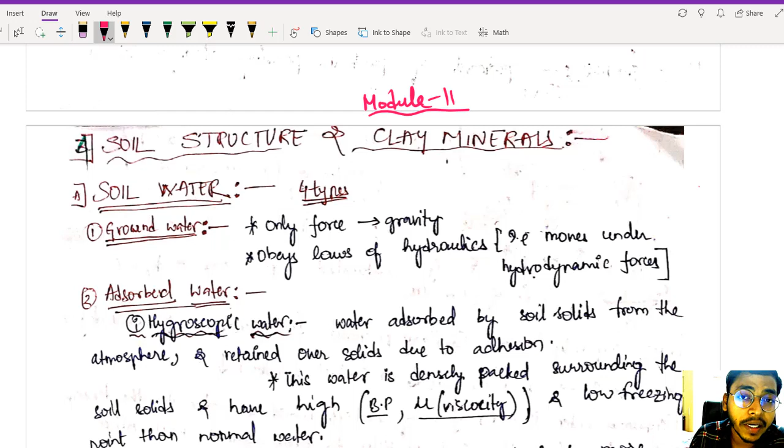In this video, I am going to continue with module number 11 of soil mechanics. We are going to start a fresh chapter, soil structure and clay minerals. All the basic concepts like soil water, bulking of sand - you might have heard this term, right? We will study that concept also in this module. After that we will see soil structures like honeycomb structure, flocculent, dispersed - these we will cover in module 12, where I will also sum up this chapter with clay minerals like kaolinite, illite, montmorillonite. This is a very basic theory chapter, no numericals will be asked, but this theory is important for small exams like SSC, JE, State PSC. So please concentrate on this topic, a bit can come from anywhere.

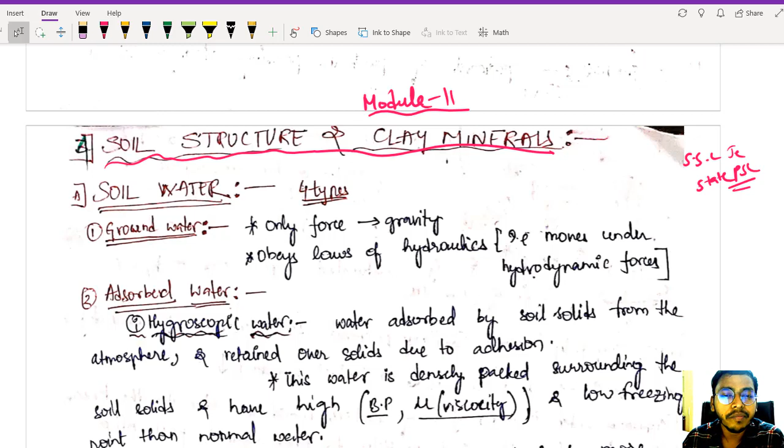Now coming to soil water, the very first topic which I am going to teach. There are four types of water which you have to understand. In soil there are four different types of water present. Let us try to imagine this.

Below the ground level - just go outside your home, wherever you are standing, let us say that is the ground level. Below the ground level, somewhere here we will be having our groundwater table. Below the groundwater table, groundwater is flowing. All this soil below this is completely saturated, so this zone is also called the zone of saturation. The water present in this zone, we are calling it groundwater.

What is the force acting on groundwater? It is gravitational force. So my groundwater will be flowing in the direction in which gravity is pulling it - it's a matter of common sense. So all the laws of hydraulics are valid for groundwater. Like continuity equation, whatever equation you want to apply of hydraulics, you can apply for groundwater, no issues. Now let us see the second type of water.

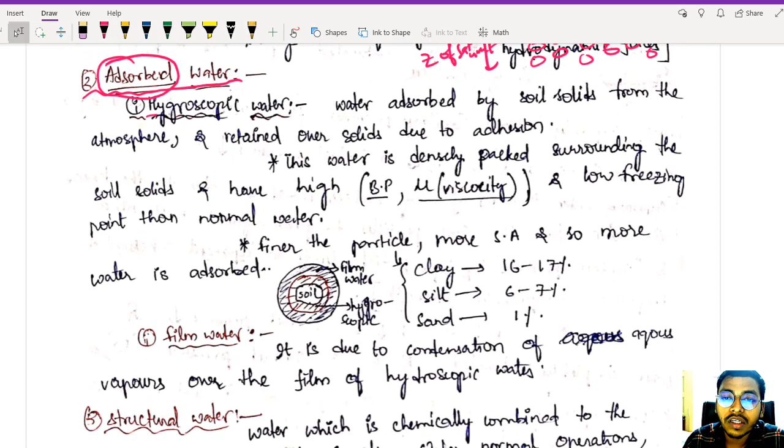So the second type of water is adsorbed water - the name itself is saying it. The water which is adsorbed on our soil solids, we call it adsorbed water. There are two types of adsorbed water: one is hygroscopic water, second is film water. So what is hygroscopic water? It is nothing but the water which got adsorbed on the soil solid.

From the atmosphere, we are calling it hygroscopic water. Water adsorbed by soil solids from atmosphere and retained over solids due to adhesion, we are calling it hygroscopic water. I hope you remember these terms, right - adhesion and cohesion.

Do you remember, I taught this in fluid mechanics - cohesion? If you have intermolecular forces between molecules of the same nature, what do we call it? We call it cohesion - intermolecular forces between particles of the same nature. For example, if you take clay, the clay particles are bonded with each other. So this force acting between these particles, I am calling it cohesion, because all the particles are of clay. So there is some bonding between them, intermolecular forces present between them - we are calling it cohesion.

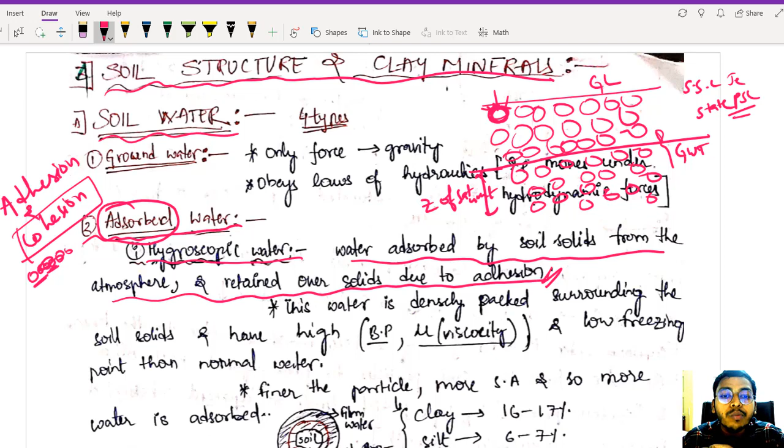So what is adhesion? For example, just dip your finger in water. What is happening? When you take your finger out, you will feel water is present on your finger, right? What happened? There is some affinity between your water molecule and your finger. If there is intermolecular force of attraction between molecules of different nature, we call it adhesive forces or adhesion. So dip your finger in water, take it out, you will feel there is some wetness on your finger - this is because of adhesion between the water molecule and your finger. I hope you understood the difference between adhesion and cohesion.

I had also given you a hint on how to remember this. You might get confused after some time, like after 3 or 4 months, between adhesion and cohesion. What is the hint I have given?

Remember in alphabetical order: A B C D E F G H I J K L M N O P Q R S T. So in alphabetical order, I am writing these terms.

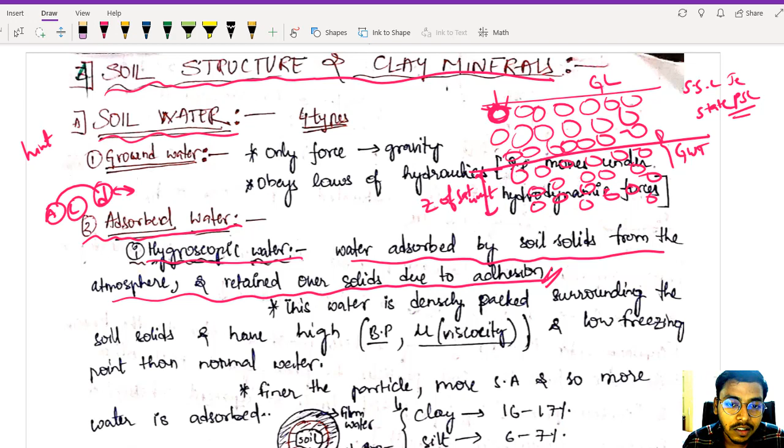Adhesion is for different particles, cohesion is for same particles. This is how I remember it, because the confusion is mostly between which one is different and which one is similar. Just write these terms in alphabetical order: adhesion becomes D, which is different particles, and cohesion becomes similar particles. Maybe this will be helpful to you also in some exam.

So let us understand this hygroscopic water. It is tightly packed, densely packed. So what happens is it will have high boiling point and viscosity. As it is tightly packed, it does not move easily, so we call that viscosity very high. So this water which is densely packed surrounding the soil solids will have high boiling point and viscosity, and low freezing point compared to normal water.

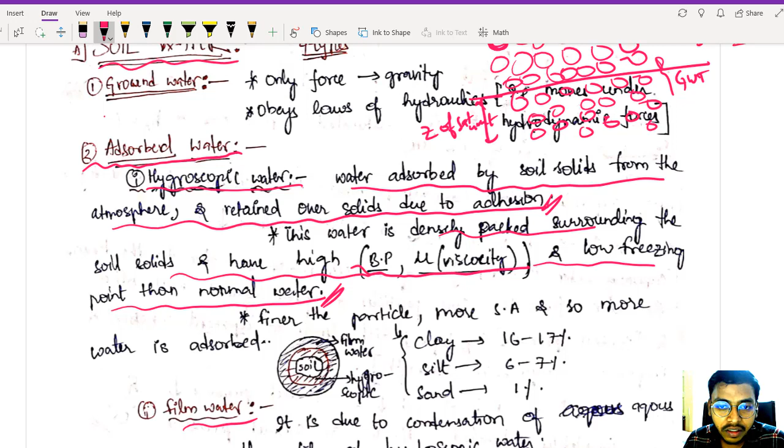Things are clear? I hope you understood what adsorbed water is. Finer the particle, more surface area will be there, so more water will be adsorbed. It's common sense, you already know, right? If the particle is finer, if you have fine soil, your surface area will be more compared to coarse grain particles. So more water will be adsorbed for fine grain particles compared to coarse grain particles. This is the first type of adsorbed water, hygroscopic water. I hope you are clear, right?

Now let us see what is film water. On this hygroscopic water, let me draw it. If this is soil, on the soil you will be having this hygroscopic water. On this hygroscopic water, there will be one more film formed. This is because of condensation of aqueous vapors on the soil solids. Because of the condensation, you get one more layer, and this layer we call film water. So it is due to condensation of aqueous vapors over the film of hygroscopic water.

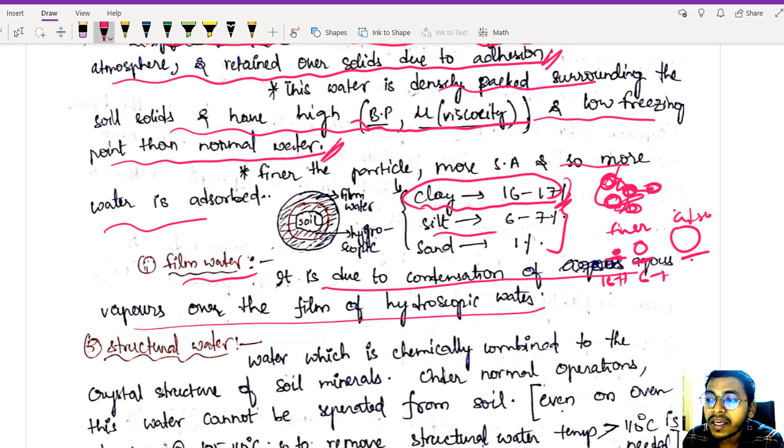So basically I told you, the finer the particles, the more is your adsorbed water. So you can see for clay it is around 16 to 17%, whereas silt, because clay is finer compared to silt, and silt is finer compared to sand, you can see the magnitude. In clay, the water content due to adsorbed water is around 16 to 17%, whereas for silt it will be just 6 to 7%. For sand, it is more coarse, so surface area is quite less. So as surface area for sand is less, it will be having only 1% of water content because of this adsorbed water. Things are clear?

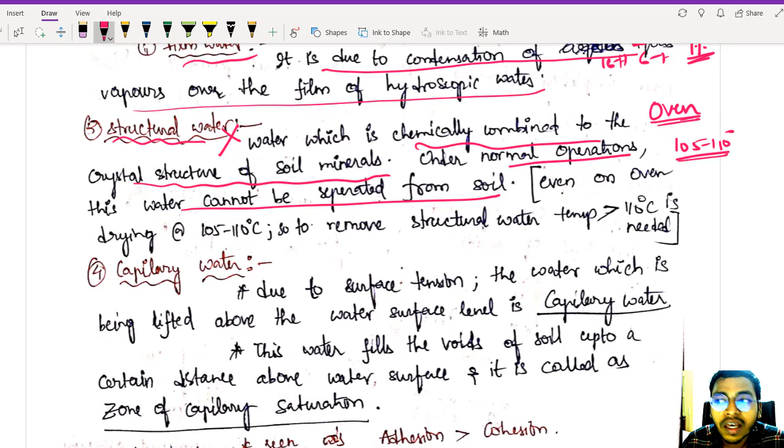Now let us see structural water. I have already explained structural water once before in previous chapters. What is it? The water which is chemically combined in the crystal structure of minerals itself, present inside your soil solids. Whatever mineral content the soil has, the water molecules present inside it, we call structural water - water which is chemically combined to the crystal structure of soil minerals. Under normal operations, this water cannot be separated, as it is present inside soil solids, you cannot take it out. If you are heating in the oven dry method, I have told you we heat only up to 105 to 110 degrees in inorganic soil, so that structural water is not evaporated. If you heat more than 110 degrees, only then structural water will be released. So in oven dry method, our limit is 110 degrees. If you want to remove structural water, you have to heat at very high temperature, more than 110 degrees, only then this water will be released.

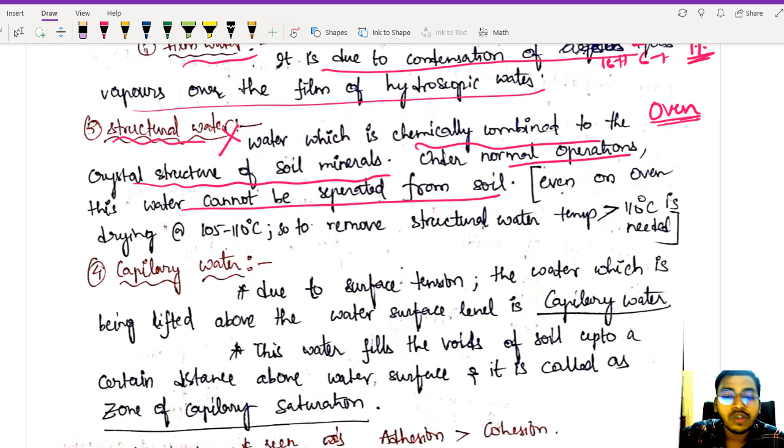Things are clear? Now let us see the last type of water, which is capillary water. Due to surface tension, some of the water from the groundwater table is being lifted above.

Okay, so this water is called capillary water. Let us try to understand. This is my groundwater table. Below this, the soil is fully saturated.

Above here we have a zone of aeration. The top layer we are calling zone of aeration. So the layer which is just above the zone of saturation, above this groundwater table, it will also be saturated. How? Let us try to understand.

See, when I am talking about soil solids, it will have some voids, and in these voids there will be some capillary action. Because of this capillary action, my water is rising above this groundwater table. Actually, gravitational forces act in downward direction.

So basically water should flow from top to bottom. But here the water is flowing against the gravitational forces and trying to go up. This is called capillary action. Because of this capillary action, we are getting this zone of capillary saturation, or zone of capillarity.

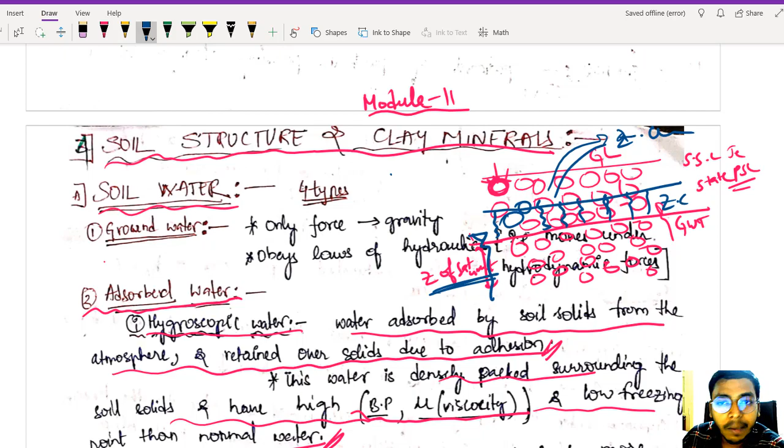Things are clear? Okay, now let us read this definition and then I will derive this formula in like 10 seconds. It is not necessary to derive it in soil mechanics, this is the concept of fluid mechanics, but just to make you feel easy, I will derive it once again.

So capillary water: due to surface tension, there is adhesion between soil particles and water. Because of this adhesion, there is some affinity between solids and water. Because of this affinity, the water is being lifted above, because of this surface tension, and the water which is lifted above this water surface, we are calling it capillary water.

So above this groundwater table, whatever water is raised, we are calling it capillary water. This water has risen against the gravitational pull, you have to remember this. This water fills the voids of soil up to a certain distance above the water surface, and this zone we are calling the zone of capillary saturation. Things are clear? Everything fine?

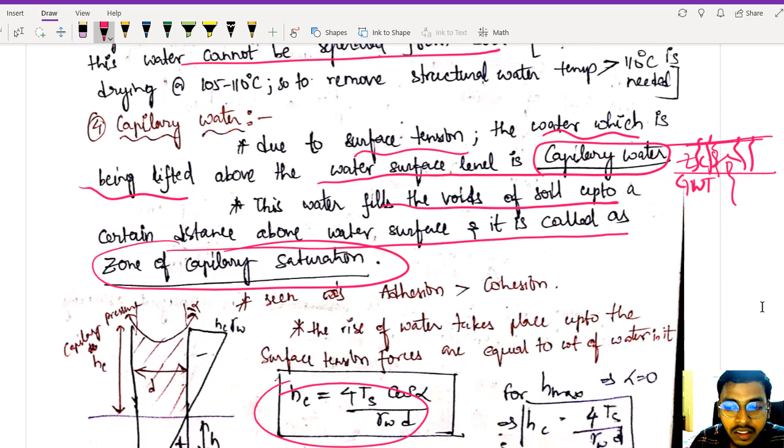So let us derive this. Very simple. In fluid mechanics, we used to take one capillary tube and immerse it in water. A capillary tube in general will be less than 1 centimeter diameter, and we just have to immerse it in water. When we immerse it, I'll draw it a bit bigger so it's visible, actually it should be less than 1 centimeter but it won't be visible, so I'm drawing it bigger.

So if you take big tubes, you won't see any rise because it is inversely proportional to diameter. If your diameter is bigger, the height of rise will become quite small, negligible. If you take a smaller diameter, then obviously your height of rise will be more. So what is happening here?

There will be a certain rise in water surface because of this surface tension. Obviously the water which rises in tubes, you might have seen in a chemical laboratory, you've done a lot of experiments with pipette, burette. The water level will be in the form of a meniscus here. I hope things are clear.

So there is some surface tension acting, which is lifting this water up to a certain height, and this height I am calling capillary height, HC. How to calculate this capillary height? The height the water has risen above its original surface, we are calling this capillary height. How to calculate? Very simple.

Here your tensile force is acting. In 2 dimensions it looks like this, but in 3 dimensions, just imagine we have a circular tube. All around this circle there is water which is in contact with the glass, so surface tension is acting all over the circle. In 2 dimensions I am representing it this way, but originally it is acting all over the surface.

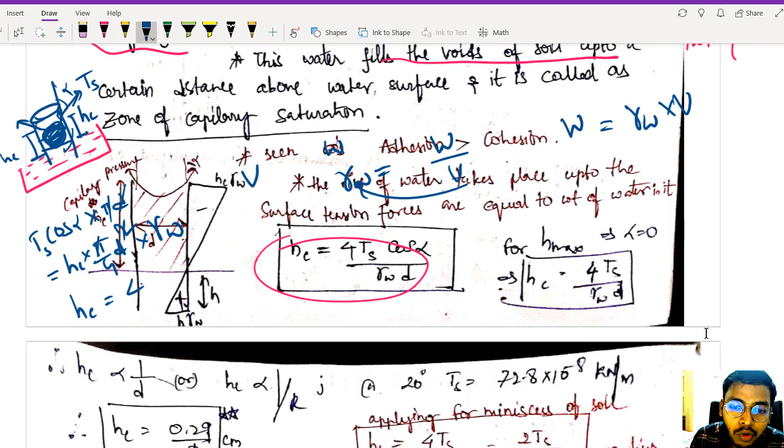But if you want weight, what to do? You know the volume, you want weight - just use gamma w equals weight of water divided by volume. So if you want weight, just multiply by gamma w into volume. Pi cancels, d square cancels. So if you want hc, you send 4 above: hc equals 4 Ts cos alpha divided by gamma w into d. So this is my formula, as simple as that.

Now a derivation - if you assume this alpha is equal to 0, meaning it is acting perfectly straight, that is the assumption, though actually alpha remains. If we assume alpha is equal to 0, then cos alpha will be 1. If alpha is 0, cos alpha becomes cos 0, which is 1. So I can write 4 Ts by gamma w d.

So this is my H maximum. H maximum comes when alpha is equal to 0. So your maximum height which can be raised in the capillary tube is 4 Ts divided by gamma w into d. Very simple, right? I hope you understood perfectly.

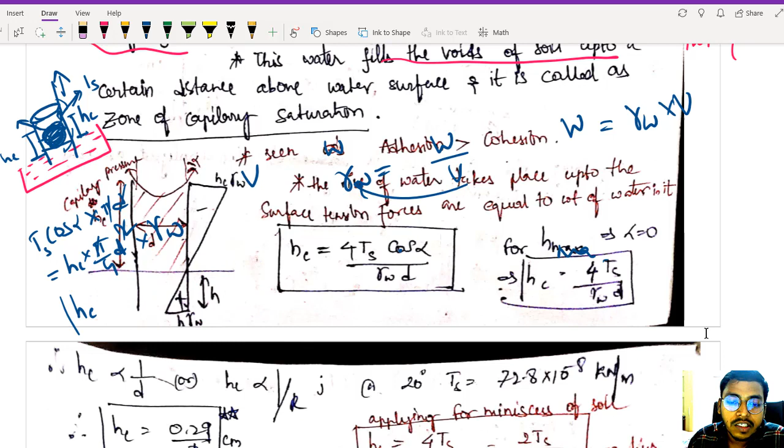So you can see your height of rise is inversely proportional to diameter. If diameter is small, height of rise will be more; if diameter is large, take a bigger tube, and very little height rise will remain. Things are clear? So as it is inversely proportional to D, I can also write it is inversely proportional to R.

Okay, things are clear? So basically at 20 degree centigrade, the surface tension Ts will be 72.8 into 10 to the power of minus 8 kilonewton per meter. So if you substitute this, you will get this equation: your height in the capillary tube will be 0.29 divided by D, in centimeters.

Now let us apply this concept in soil. We have done this experiment in the laboratory using a capillary tube, and we got Hc equals 4 Ts cos alpha by gamma w d. Very good. But now let us apply this in real life conditions. What will happen in soil? Let us try to understand.

So when I have solids, let us say this is my soil solids, and water rises in the voids - in between the soil voids, wherever the voids of the soil remain, water will be there. So water will take the same form of meniscus as it does in the capillary tube.

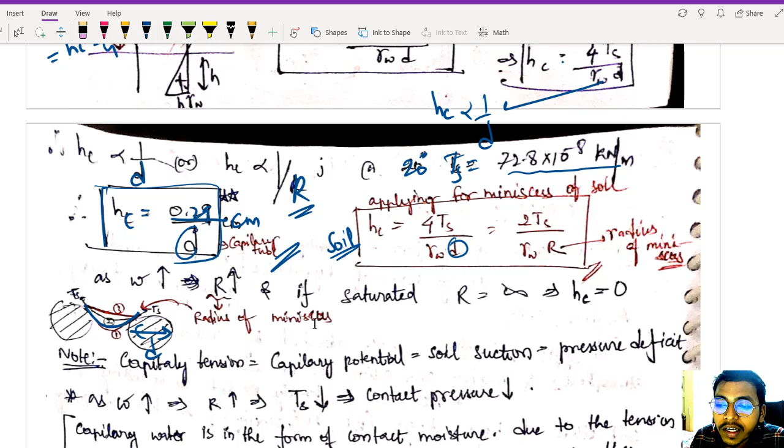Things are clear? So now tell me, what is the D here? When we use this D in the formula, many people get confused - it is not the diameter of the solid. It is not the diameter of the solid particle; in capillary rise it was the diameter of the water tube, and here too it will be the same. It is the diameter of the voids, or to be precise, you can say you are following this meniscus.

A meniscus is forming, and here surface tension is acting. So you can say it is the diameter of your meniscus, or in simple language, diameter of your voids, but more precisely, diameter of your meniscus. Things are clear? I hope you understood this point.

So your height of capillary rise in soil will be 4 Ts by gamma W into D, where D is diameter of meniscus. Or you can write 2R instead of D, where R is radius of meniscus. So 2 cancels out, and you get 2 Ts by gamma W R, where R is your radius of meniscus.

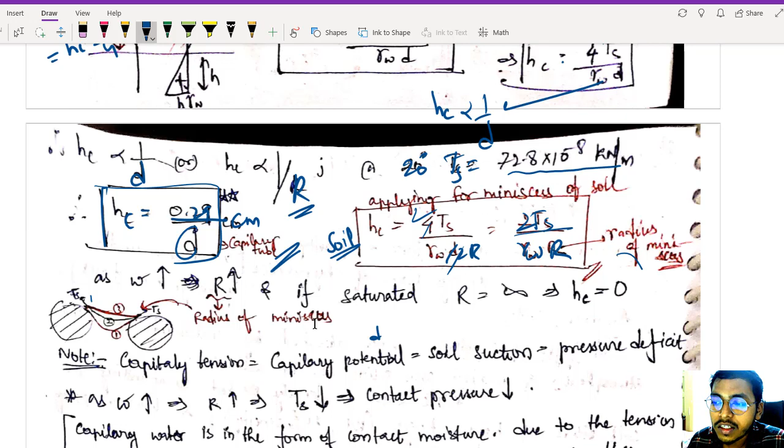Now let us try to understand what is happening in this soil. See, first of all, you have some meniscus like this. When water level is less, you will be having some meniscus like this.

But as your water content is increasing, as more water is present in between soil solids, what will happen to this meniscus? The meniscus will get straightened. Pehle meniscus tha kuch is tarah se, it was something like this. Now as it gets more water content, slowly it is getting flatter.

Okay, let us zoom this diagram. Previously my meniscus was something like this. So as the water content is increasing, what will happen? This meniscus will start to get straightened up, so it will be getting straightened up as your water content is increasing. Agreed? So what is happening to your R value as your water content is increasing?

What is happening to your R value? Let us try to understand. Previously, in the first case, when you have a meniscus something like this — circle form kar lena — what was your radius? This was your radius, this was your radius. Radius was very less.

Now when it got straightened up, when it got a little bit straightened up, what is happening? Ek circle daal lena, you are getting a bigger circle. So what happened to your radius? Radius is increasing. When it got flattened, for example when the water content has raised to the extent that it is fully saturated, so what is your R value now? R value is infinite, you cannot draw a circle, right? Itna bada circle hai, toh R infinite ho jayega.

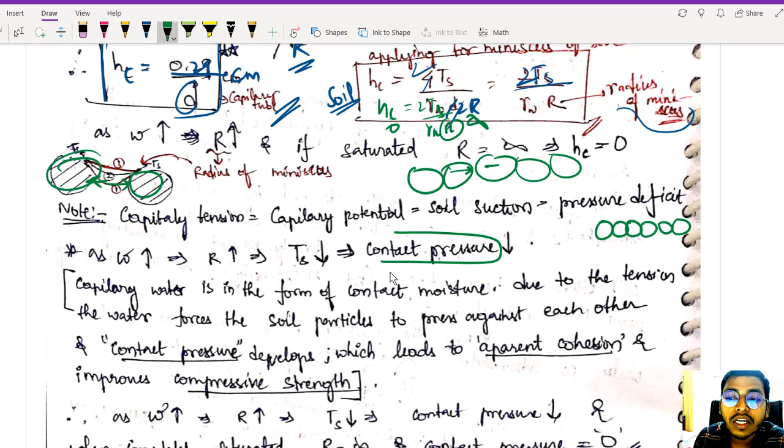The pressure developed in between the soil solids, we are calling it contact pressure, because as they are in contact, as the tensile force increases, what happens? More the tensile force, more your contact force will be, the more your contact pressure between soil solids will be. It's common sense. I hope you're perfect in this thing.

Because of this apparent cohesion, even sand particles will feel they have some affinity. So what is happening? Strength is increasing. Because of this apparent cohesion, your strength of soil is increasing.

Now let us try to understand. This is a very important bit. Your capillary tension has many names. It can also be called capillary potential, one and the same. Whenever I am using capillary tension, it is same as capillary potential. If in the exam they give capillary potential, don't get confused, it is same as capillary tension.

Or it can also be called soil suction, or pressure deficit. All these names are of capillary tension only: capillary potential, soil suction and pressure deficit. So what is happening?

As our water content is increasing, because of these capillaries, our water content in soil is increasing. Because of this water content rise, the radius of our meniscus is increasing. Previously it was something like this, but with more water content, this is getting straightened up. I explained this above, right?

So as it is getting straightened up, your surface tension will be decreasing, and so your contact pressure will be decreasing. Surface tension is reducing. If surface tension is reducing then tensile forces are reducing, so compressive forces are also reducing. Your contact pressure is decreasing in between solid particles. Things are clear? More the water content, your contact pressure will be less.

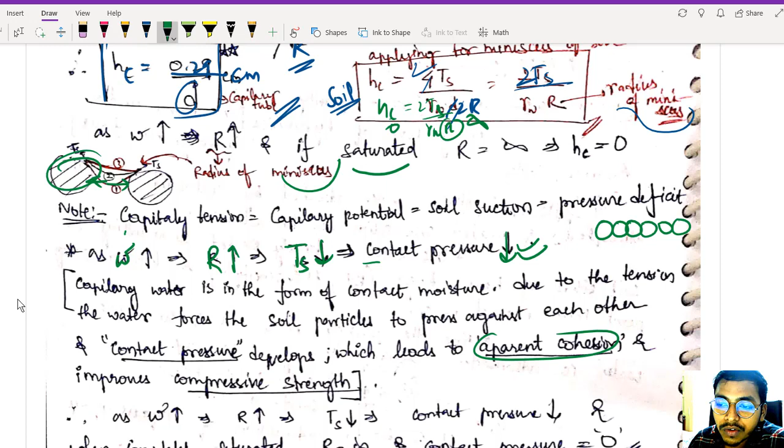So capillary water is in the form of contact moisture. Due to the tension, the water forces the soil particles to press against each other and contact pressure is developed. This leads to apparent cohesion. I hope things are clear, right?

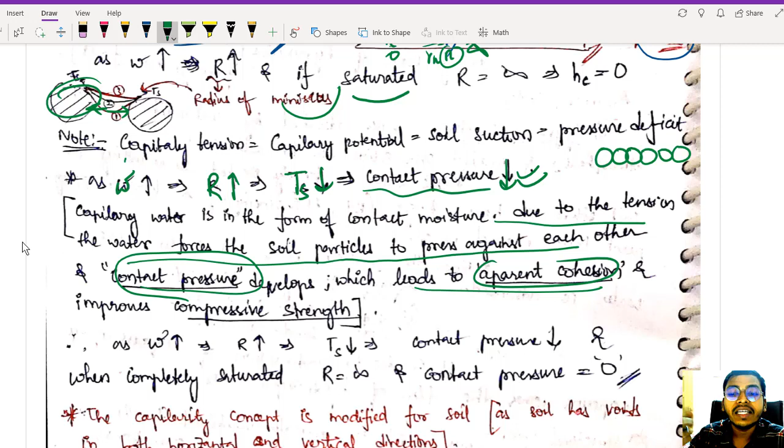Because of this contact pressure, there is apparent cohesion between solid particles and it improves the compressive strength of soil. But as you continuously add water, your radius of meniscus increases, your surface tension decreases. If tension is less, obviously your contact pressure will be less. If your contact pressure is less, this apparent cohesion will slowly go out.

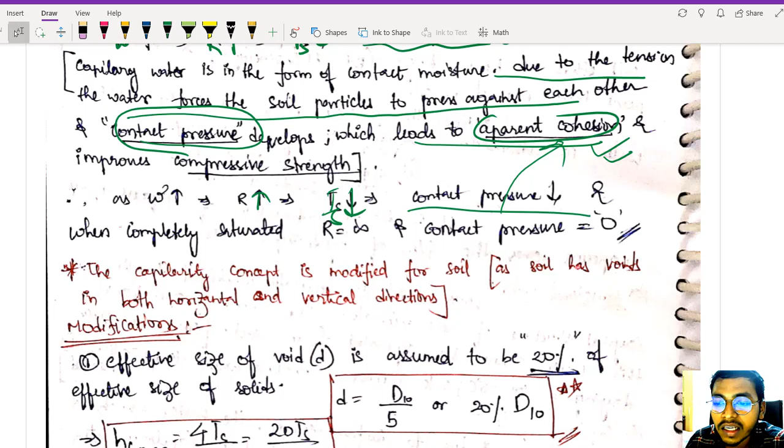I hope things are clear. And slowly your soil will be losing its compressive strength. As you are saturating, it will be losing compressive strength in this zone. Things are clear? One important thing you have to understand. So far you are perfect, right?

One more thing you have to understand, this concept whatever you have read, HC equals 4TS divided by gamma WD, cos alpha will also be there. If you neglect cos alpha, this was the formula which you got. But this is when you have a vertical tube like this capillary tube.

But imagine, when you take our soil in natural condition, you have voids in vertical direction and horizontal direction also, agreed? So we cannot exactly use this formula. We have to modify this formula. How to modify? Let us try to understand.

We have to take, instead of d, we don't know this d value, right? So we have to take this effective size of d to accommodate this horizontal and vertical void direction. So we are taking this d as d10 divided by 5. What is d10? Effective size of your soil solid, whatever d10 comes, so d10 divided by 5 gives us the effective size of void. Things are clear? So d10 by 5, or you can say 20% of d10.

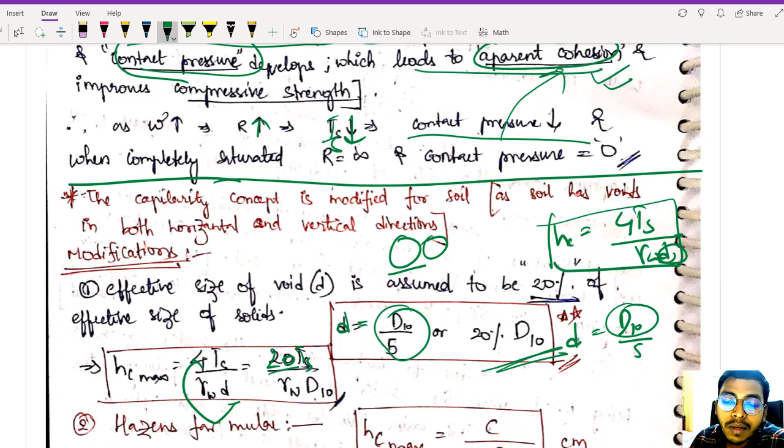So just substitute d10 by 5 here, instead of d, what will you get? 5 will go to the numerator, so you will be getting 20 TS by gamma W d10. It's common sense. So your HC maximum will be 20 TS gamma W d10.

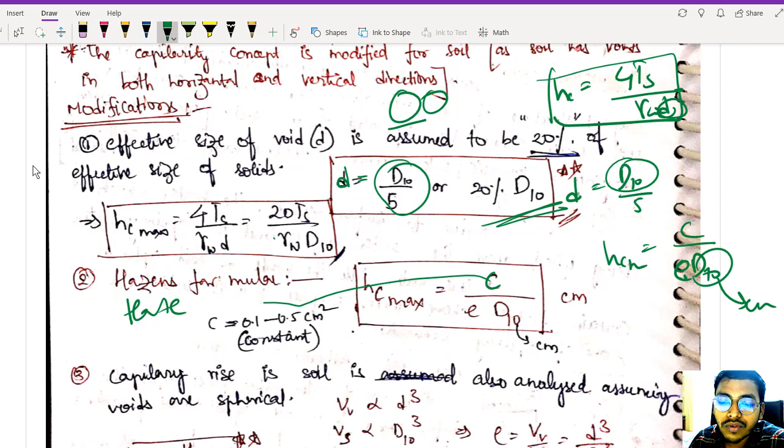Remember this, important for objective purpose. There is one more formula given by Hazen, he directly gave it: HC maximum equals C by E into d10, where d10 is in centimeter. Very simple formula, C by E d10, and C was a constant ranging from 0.1 to 0.5 centimeter square.

There is one more assumption: we can assume our voids are spherical. So if my voids are spherical, what will be the volume of voids? When taking a sphere, volume will be proportional to diameter cube, so volume of voids is d cube. Similarly, volume of solids will be effective size, effective size is d10 cube. So I can write void ratio Vv by Vs as d cube by d10 cube now.

Agreed? So what will be my d? D will be E to the power of 1 by 3, d10. Because I just sent the cube to the other side, so 1 by 3 comes. So d is equal to E to the power of 1 by 3 capital D10. If I substitute this, I will be getting HC max equals 4 TS gamma W E to the power of 1 by 3 d10.

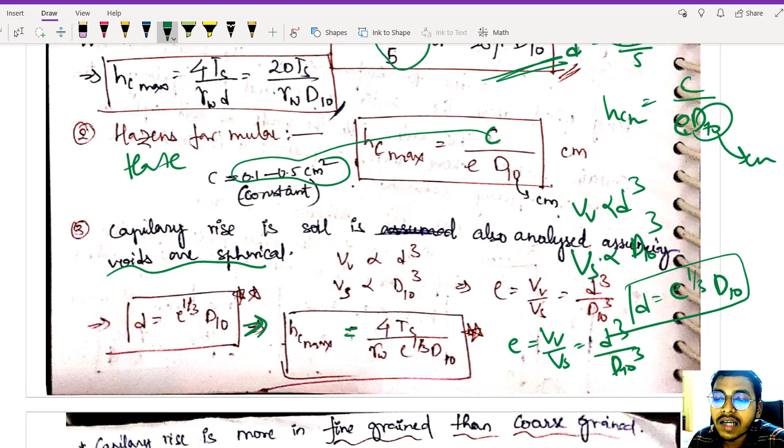So these are the various forms of HC maximum we have in our soil mechanics. I have told you our HC is inversely proportional to diameter.

So what happens: if you have a fine grain soil, our capillary rise will be more, because fine grain soil has very less voids, the void area is very less since they are tightly packed, so the rise will be more. If you take coarse grain particles, they are loosely packed, they don't pack straight because of coarse grain particles, so there is a lot of void distance. As there is more void distance, the capillary rise will be less. Remember this: capillary rise is more in fine grain soil compared to coarse grain soil.

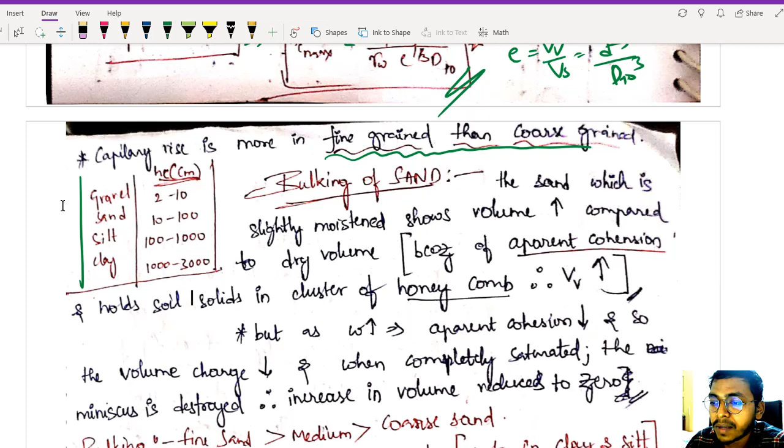Bulking of sand is because of moisture content. Let us understand what is happening. First, when the soil is in a dry state, if I take this sand, it is coarse grain, it doesn't have any cohesive forces in it. There are no cohesive forces, its strength is quite low, and the sand will generally be in a coarse grain structure, something like this, because of gravity, random orientation will remain.

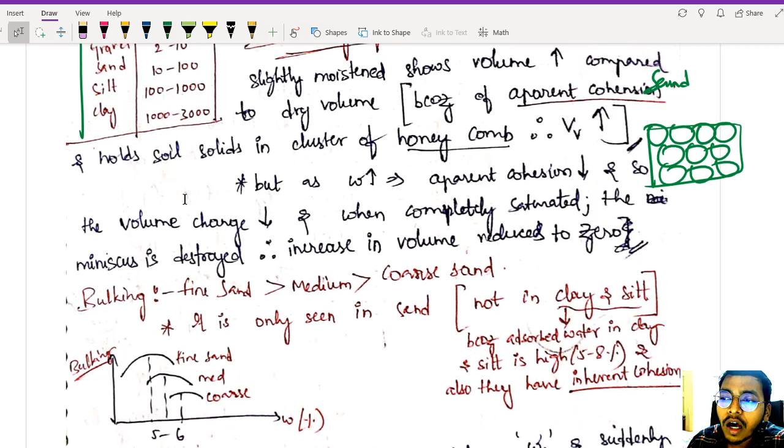We'll read the details, no issues. So here you can see this is how coarse grain structure will look, no particular shape, as gravity force pulls it into that shape. Things are simple, right? Now the strength will be quite low. Now as soon as you add water, what will happen is the contact pressure concept we studied earlier, contact pressure will increase as water content increases in the sand.

If you are adding some water, water content is increasing because of it contact pressure is increasing. Contact pressure increases, so apparent cohesion increases. There will be some cohesion in between the soil solids.

So what is happening? Soil solids can now have certain strength and they will reorganize the structure, they get modified into honeycomb structure. Generally this honeycomb structure is seen only in fine grain solids. But now, as it got some apparent cohesion, it has some intermolecular force of attraction similar to that of fine grain solids, and it can rearrange itself into the honeycomb structure.

So what is happening, your volume of voids is increasing now. As it got some strength, it can rearrange in a better way and it is getting a honeycomb structure. So your volume of voids is increasing. This is called bulking of sand. As you are adding some amount of water, your volume of sand is increasing. The sand which is slightly moist shows increase in volume compared to the dry volume. So this increase in volume we are calling bulking of sand.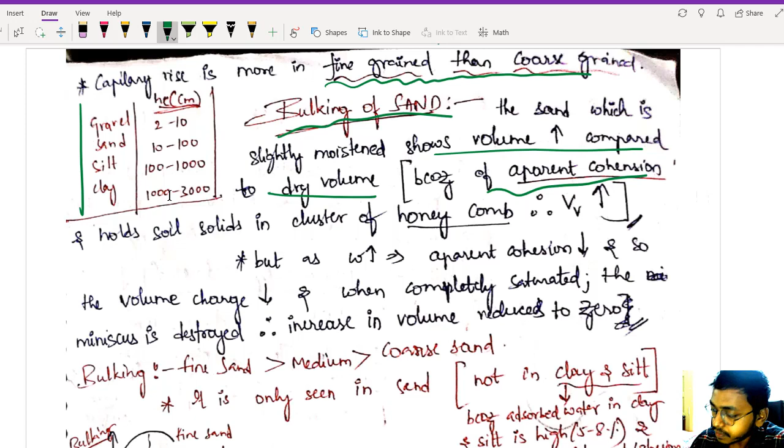Why is this increase there? Because of apparent cohesion. Because of apparent cohesion, now it can hold the soil particles in a better way, it can hold the solid particles in a better way. It will hold them in the form of a honeycomb structure.

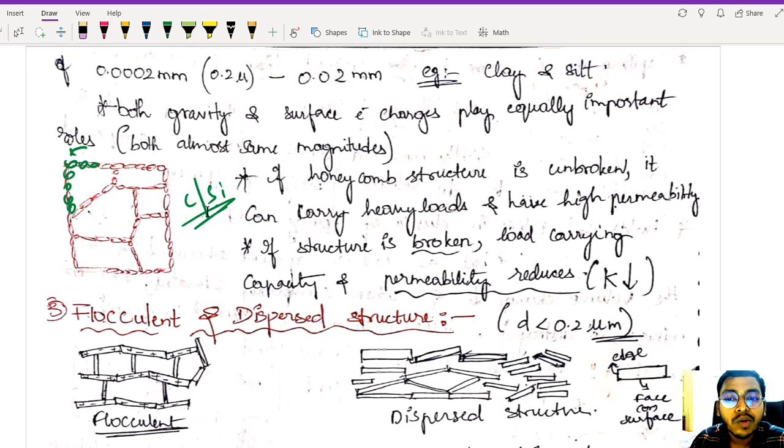But what is happening, when you add water in sand, there is some apparent cohesion, so it can rearrange itself into a honeycomb structure, and we are seeing this bulking of sand.

I had told you one more thing: if my water content keeps on increasing, what will happen to your apparent cohesion? Apparent cohesion decreases, remember? So if you keep on adding water, your apparent cohesion is decreasing, and because of that your volume will again start to decrease.

Initially it was a dry sample, let's say this is my dry sample, my volume is up to this level. Now I added some water, as soon as I added water my volume increased. But if you keep on adding water, my volume will again start to decrease. You can see the volume increased, now again the volume has started to decrease.

If you keep on adding water, if you saturate it, what will happen? If it is completely saturated, then your meniscus is completely destroyed, as we studied earlier. If the meniscus is completely destroyed, your surface tension is zero. If surface tension is zero, there is no apparent cohesion. If apparent cohesion is not there, whatever volume change was there is completely gone, the increase in volume will be reduced back to zero.

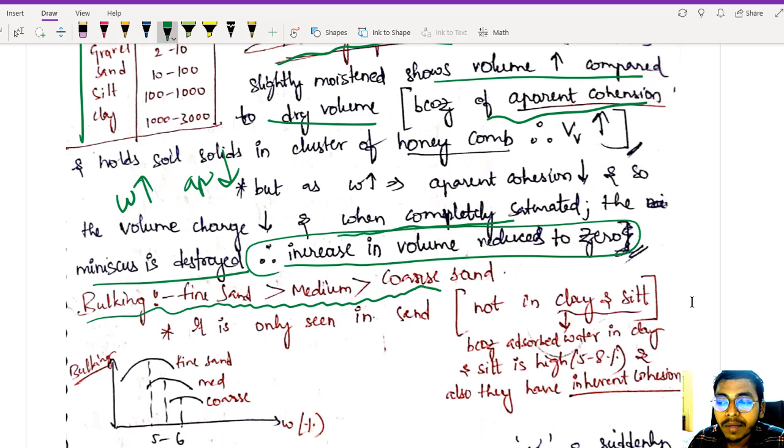Things are clear? So obviously your bulking will be more in fine sand compared to medium sand, and medium sand will be more compared to coarse sand. It's common sense, right? Fine sand will have more bulking compared to medium sand, and medium sand will have more compared to coarse sand.

Why? Because in fine sand, even the voids will be small. If voids are small, more capillary action will be there, more surface tension will be acting. If voids are big, like in coarse sand, then not as much surface tension remains, not as much tensile force acts. So obviously your apparent cohesion will also be less, therefore bulking will also be less in coarse sand compared to fine sand. It's common sense.

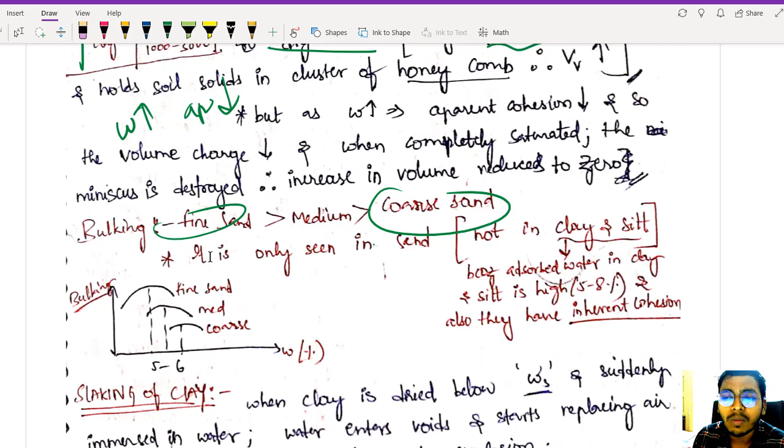I hope things are clear. And this is seen only in sand. Remember, very important: bulking of clay will not occur, bulking of silt will not occur. It is seen only in sand. Why?

Because clay and silt already have real cohesion between them, they have no need of this apparent (fake) cohesion. They have the real cohesion in between them.

So it cannot be easily destroyed because of increasing water content. Silt and clay can adsorb more amount of water, so even if you are adding water, there won't be any huge change in volume.

So remember this graph: bulking with respect to water content. If you are adding water, your bulking will first increase, and again it will be coming back to its original volume.

Fine sand's bulking will be more compared to medium sand, and medium sand's bulking will be more compared to coarse sand. And this bulking is maximum in the water content range of 5 to 6%. Remember this, the bulking is seen maximum when the water content is in the range of 5 to 6%. Super important bit.

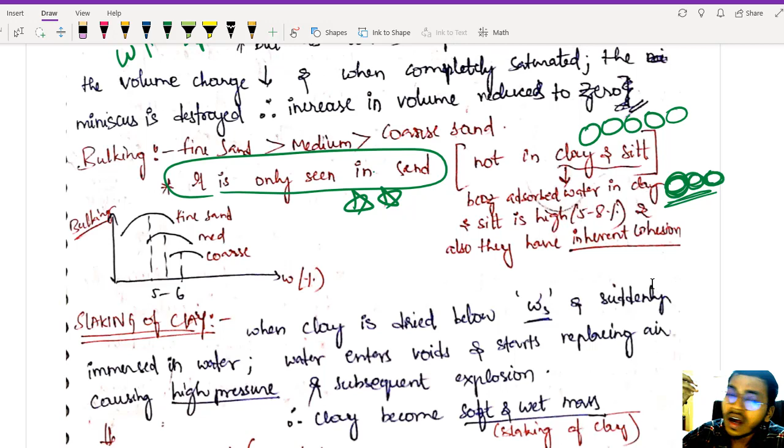This is repeatedly asked in almost all exams - PSC, SSC, RRB, JE have all asked this. Coming to the last topic of today's module, which is slaking of clay.

It's quite simple. When I'm talking about clay, it will have some intermolecular force of attraction, which is called cohesion, right? So if you are taking a clay which is partially saturated, or to be precise, take a clay which is dried below your shrinkage limit.

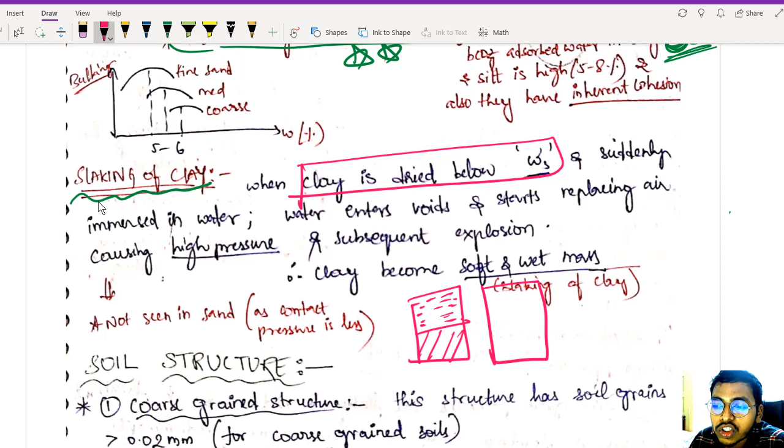What is shrinkage limit? It is the water content at which the soil is just saturated. So it was saturated up to your shrinkage limit, but now you have to dry it below shrinkage limit, meaning there are certain air voids present in your soil sample now. So take this soil sample which is clay.

Slaking is present only in fine grain soil, that too in clay. Remember this bit. So what is happening? Just throw this clay into your water beaker - take a flask of water and throw this soil sample in. Now what will happen?

The water will start trying to replace these air molecules. But in real conditions it's not like the three phase diagram - the voids are somewhere in between the soil solids.

So what is happening? This water is trying to replace the air, but it cannot go so easily, because there is some intermolecular force of attraction between the soil solids, so they cannot easily move. But these air pockets are being occupied by water, so what will happen?

There will be a very high pressure developed and there will be an explosion - some subsequent explosion. The clay becomes a soft and wet mass. Its volume suddenly changes, though you won't visually see the volume change because this is already present in water.

So this phenomenon is called slaking of clay. This slaking of clay cannot be seen in sand.

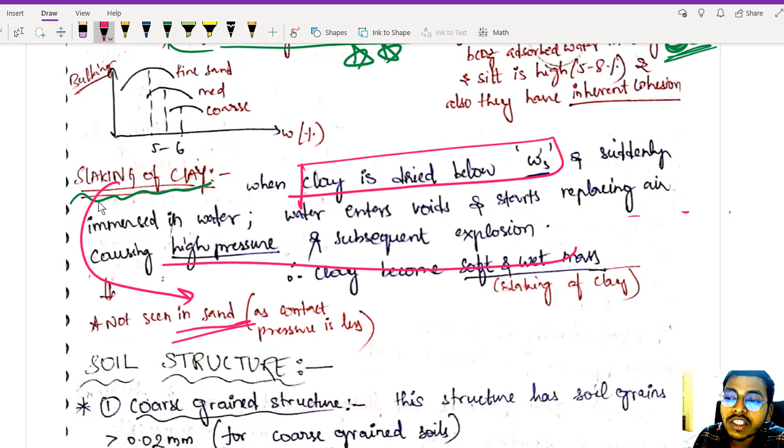So this explosion due to high pressure is possible only in clay. So I am calling it slaking of clay.